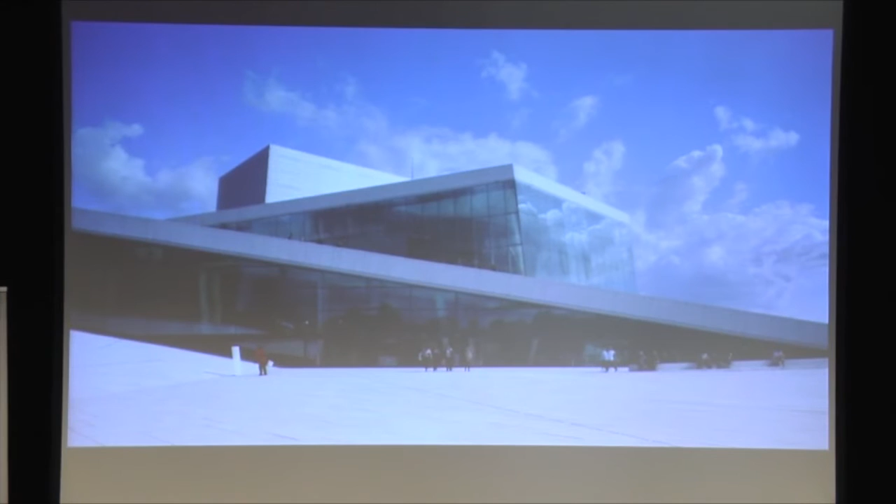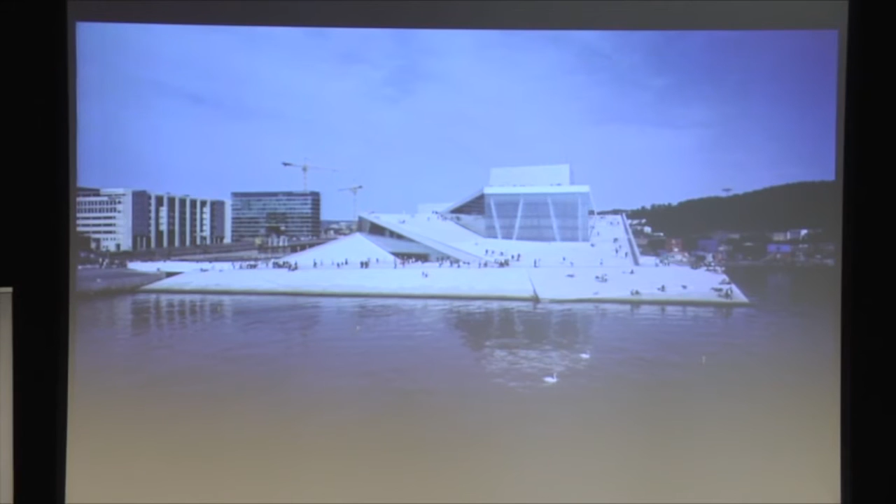Again, the generosity and public space. Of course, an opera has a big program, but what we tried is to make the roof accessible and turn it into a big public landscape space. I think personally that with the realization of the opera, the Norwegian attitude towards architecture, which we can also see in political development, has changed tremendously, because this has also become one of the main touristic attractions for Oslo and Norway.

And this roof is accessible 24 hours, with reference to the Norwegian landscape that we also use quite often. You can also see the foyer, which is also accessible, I think it's only closed at night, and how children use this space. You can see it's also used for festivals. So that's actually a dream that became true, besides solving the opera problem, but also establishing this big public space.

Space and narrative, as I also talked about—this is a concept for the big cultural project that we have currently under construction in Saudi Arabia, in Dhahran. The basic concept for the overall architecture is an arc that consists of different pebbles. You can see that the overall architectural shape or form is dependent on every single element. So all these pebbles represent different cultural functions.

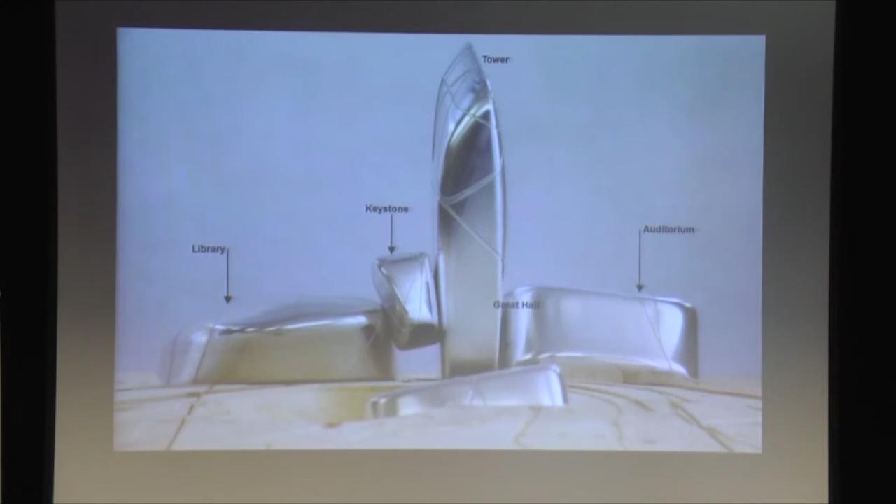This is the competition rendering, and you can see that all the different pebbles contain these cultural functions that I talked about. This is now under construction—this is, I think, one month old. So we actually always have architects working on the building site.

Again, the composition is also accessible by a big roof landscape. Some images from the different pebbles—this is the Great Hall, with a history display, a museum part, and an educational center.

The next project goes in the same direction, but this is really a child space. It's an extension of the visitor center for Swarovski, which you maybe heard about, the producer of these small crystal features, from necklaces to bigger objects. And the theme of the task was play. So it's a visitor center mainly designed for children, consisting of two main elements.

The 20-meter high play tower and the more horizontal outdoor landscape. This project opened in April 2015. So we'll guide you a little bit through the project. You can see the two elements, the more indoor-related vertical tower and the more horizontal outdoor landscape.

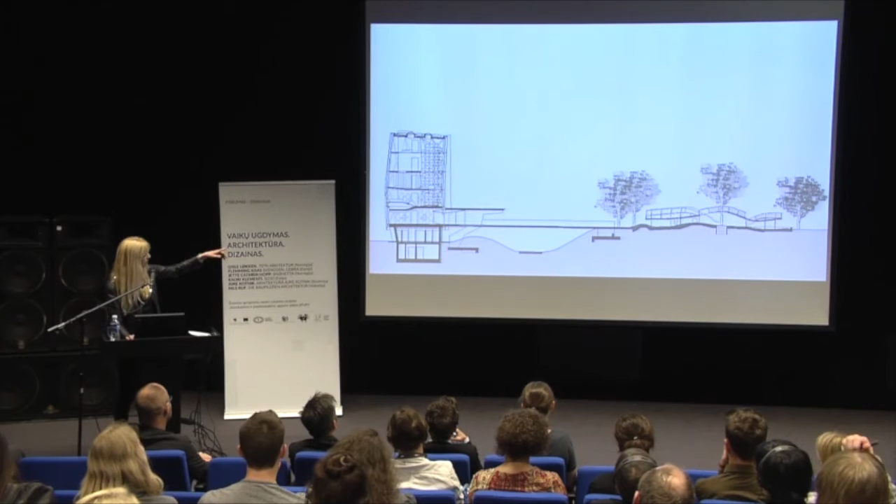And the theme, as I mentioned, was play. So this is kind of how the experience of space works in a more vertical setting, and the outdoor landscape in a more horizontal invitation to play.

The facade image here from the play tower consists of, I think, 140 individual glass panels. And from the inside it consists of 5 levels with different opportunities to play. And here you see it's completely transparent.

I will talk a little bit about the facade. Together with an artist, we developed a pattern consisting of animals that also has to do with some features Swarovski has in its product. We tried to generate, you can say, a silk screen print for the glass panels with a different pattern density.

They are white from outside the print, and from the inside they are black. So from outside it's a kind of shimmering crystalline expression, and all the panels are individual, and the gradient is concentrated so that they look slightly curved, which is a nice architectural feature as well. From inside they are black. Here you can see, they are straight, but kind of curved.

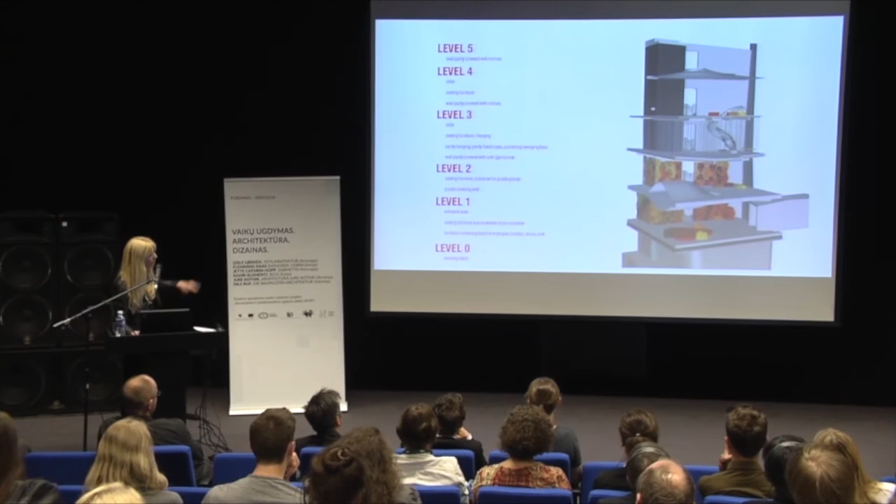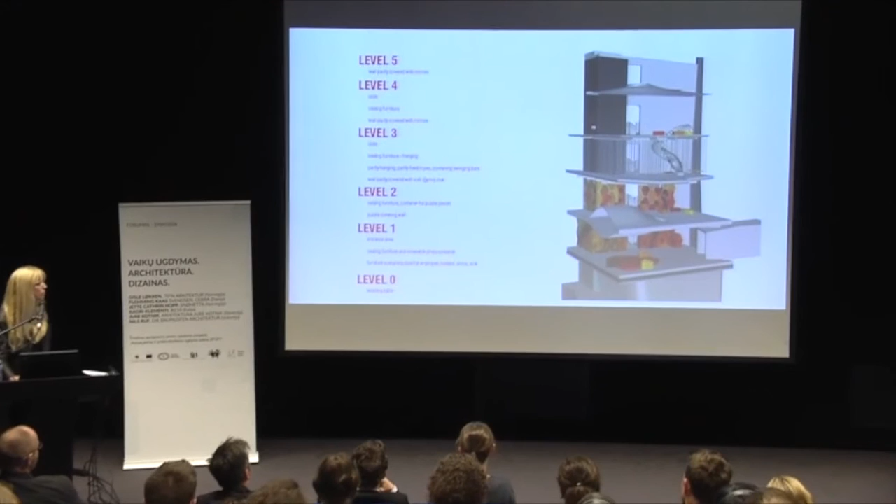Here you can see the organization of the vertical play tower, how the levels are organized. 3 of the levels are linked by a big climbing net structure, which I think is the first in the world, and of course we had to develop this feature together according to security - in Austria and Germany they're quite serious with all these stamps for security - and we got the TÜV, as it's called, for this feature.

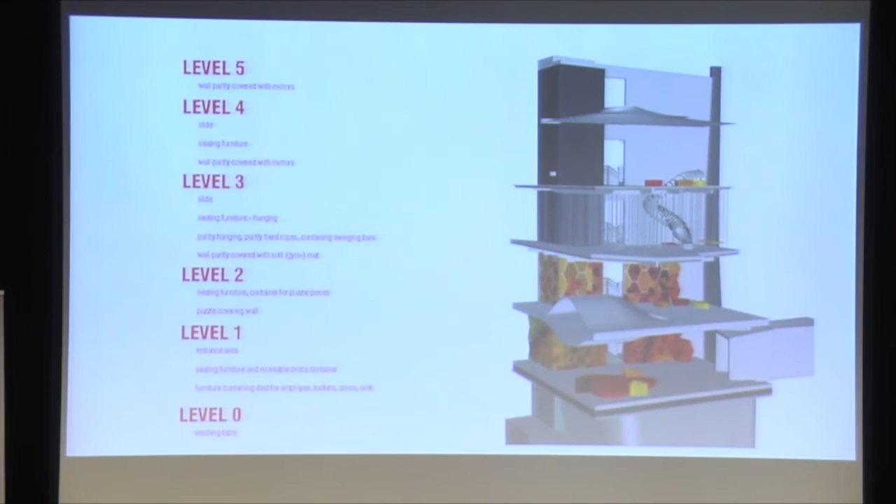Interior-wise, we worked with a color palette that is related to autumn leaves. You can see here an extract, and transferring that to all the treatment of the interior walls, lockers, of course the visitor center, and bathroom furniture, fixed furniture. So that was all kind of developed within this natural language.

Here you see one of the ground levels in use, big excitement. And this great hanging structure where, as you see, you are kind of climbing in this structure and you have this contact with this beautiful landscape in Austria outside.

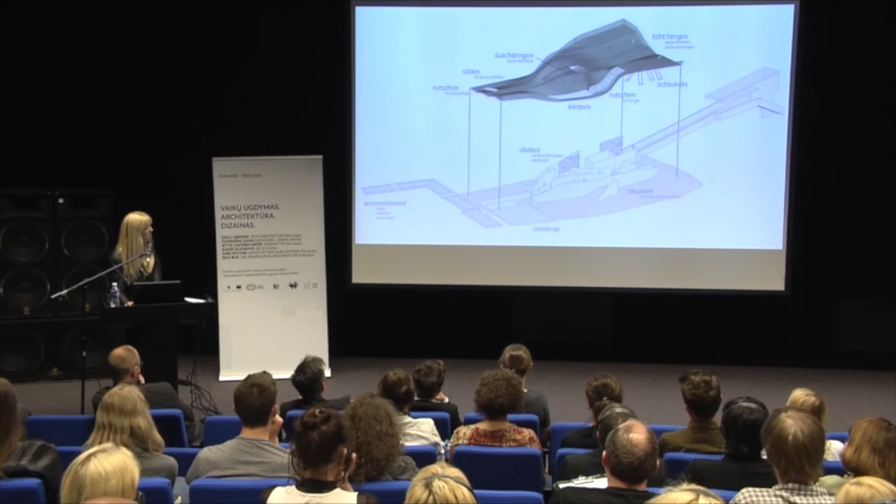The horizontal playground is kind of from two levels. We have this more surface area where you are invited to climb and sit, and the more labyrinthic, dark space underneath where it's more fairy tale related. Here you see images from the outside. And the food and beverage part, of course, there's always a cafe.

Form follows environment. Next project I will show you is a competition entry for a Plus Energy kindergarten project that we developed for an area south of Oslo, the neighbor commune as it's called in Norway. You will see how we tried to develop this sustainability project, in regards of all the technical aspects in that kind of project, but also tried to bring forward the social sustainability when you plan a kindergarten space for children.

The entrance into the project is this watercolor drawing by a very old architect, Odd Østby in Norway, where he wrote a small narrative that follows this watercolor drawing, where he describes his very first impression from childhood, where he went under an almond tree that his parents had in the garden. He said this very initial experience with space he calls Rumkunsten, space of art, where you walk in and you become part of it.

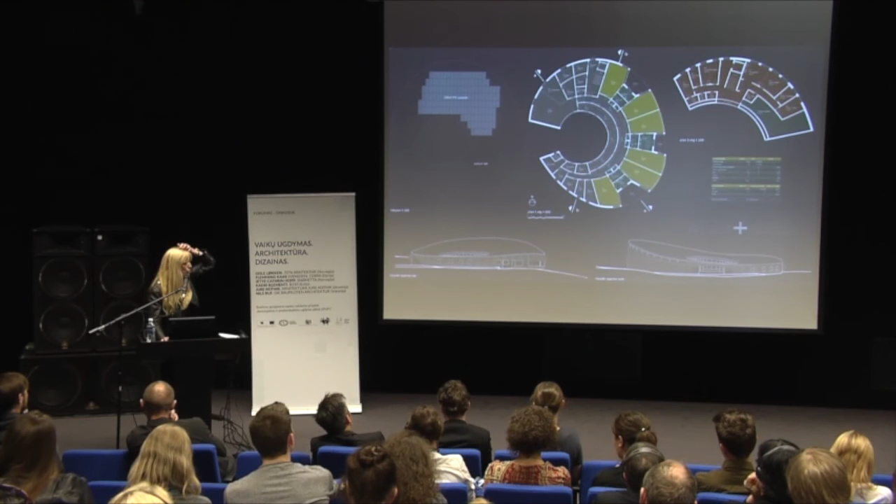In this project we also had to develop an energy strategy for ventilation. All the materials are taken into consideration in a 60-year life cycle perspective, again to show that this building is actually able to go into plus energy. So theoretically, yes.

Some images. You can see on the upper right how we tried to locate these group rooms to frame the beautiful views of the landscape.

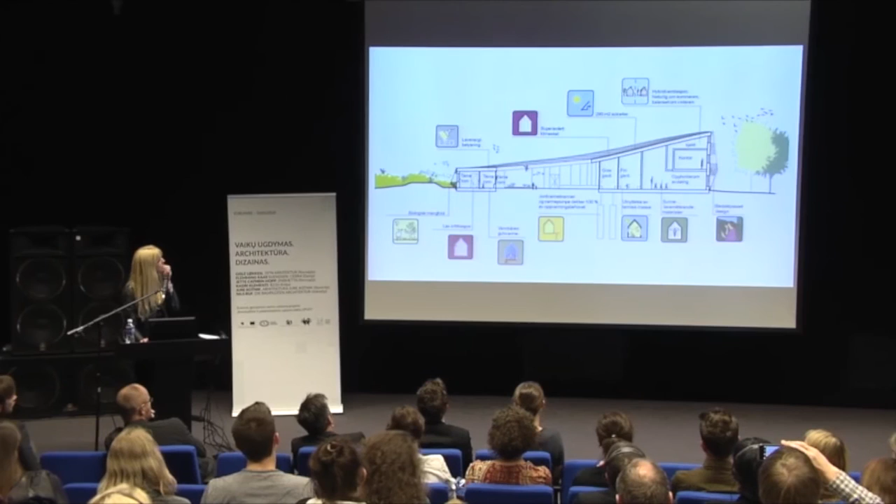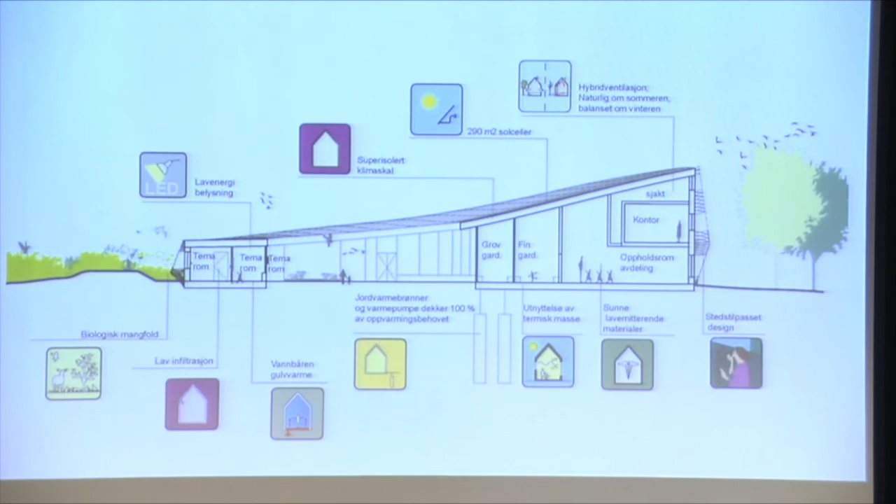An overview, unfortunately in Norwegian, but you can see the kind of toolbox for this environmental approach that we had to take into consideration. Of course, solar harvesting, but also how you design the building itself, everything from the outdoor walls, highly insulated, how you organize the plan, the zoning of the plan, and so on.

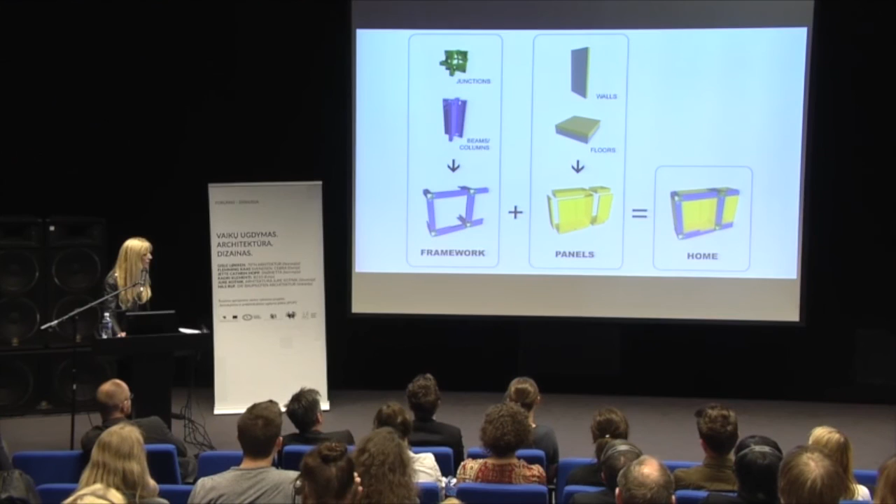Another kindergarten project that is kind of opposite, more a generic starter. Snøhetta developed, almost 10 years ago now, a modular system trying to approach the increasing need of residential projects. That was the first entry, based on a grid of 4x4 meters in both directions and 3.2 meters in height, which gives you a ceiling height of 2.7 meters once all the installations are done.

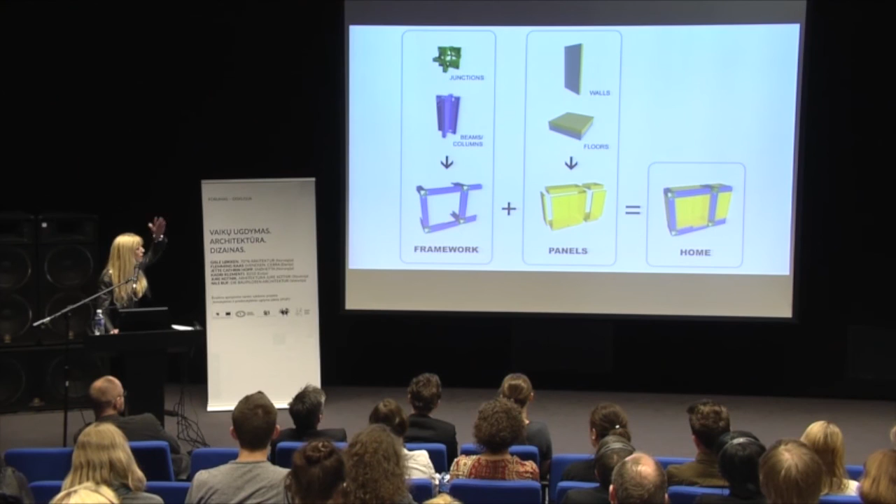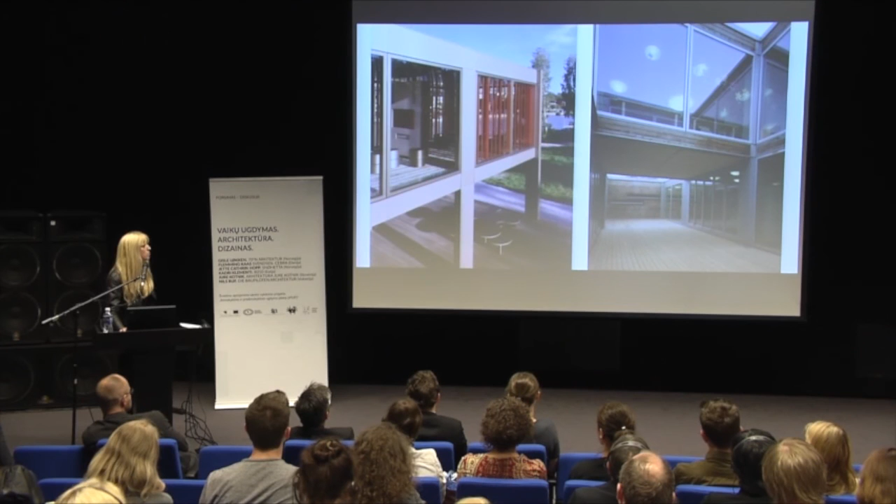So we built a demo house of this system. Here you can see some of the elements, which we also transferred into a kindergarten project that you see on the right side. So it's quite at the other edge of the project I showed you before, but it still works with this generosity of space.

It's a 4-group kindergarten organized in this very simple work model here, working with this atrium and outdoor-indoor relationship. You can see from the construction and some images of the finished project.

The last project I'll show you is more a feasibility study that we did with a private client who wants to develop an international museum for children's art in Oslo. Our client was very focused on this area in Oslo, which is now being under construction or development for decades, I would say.

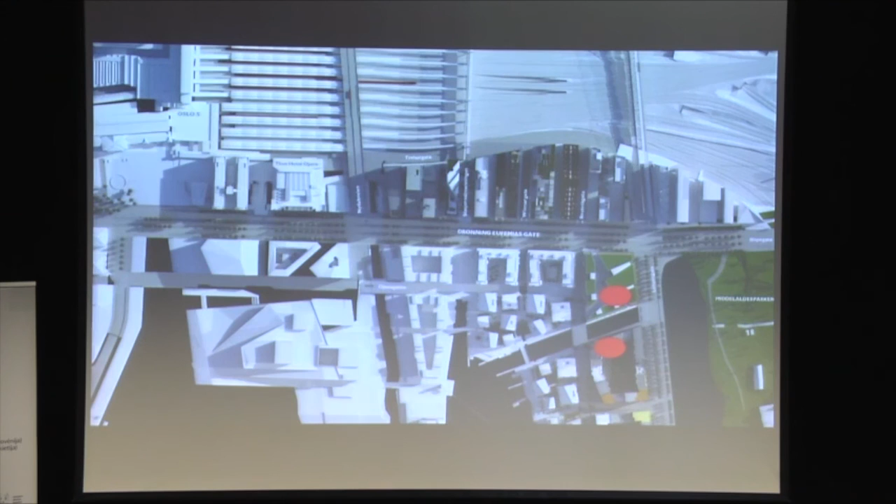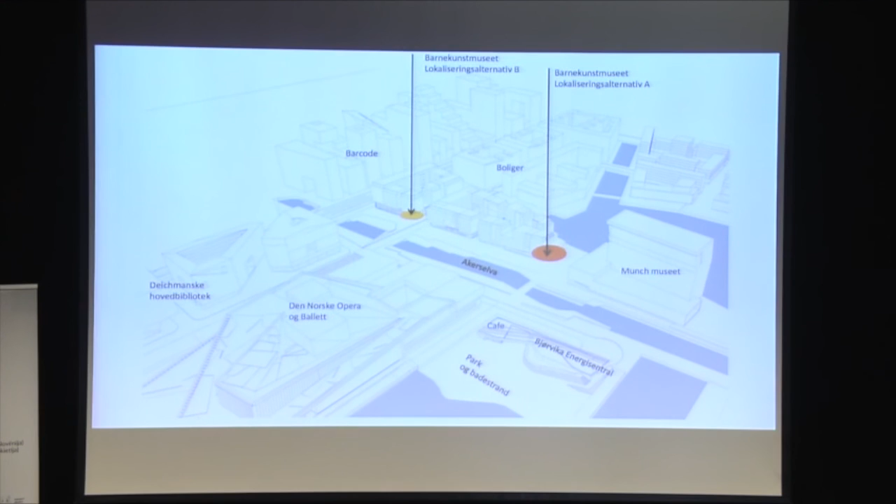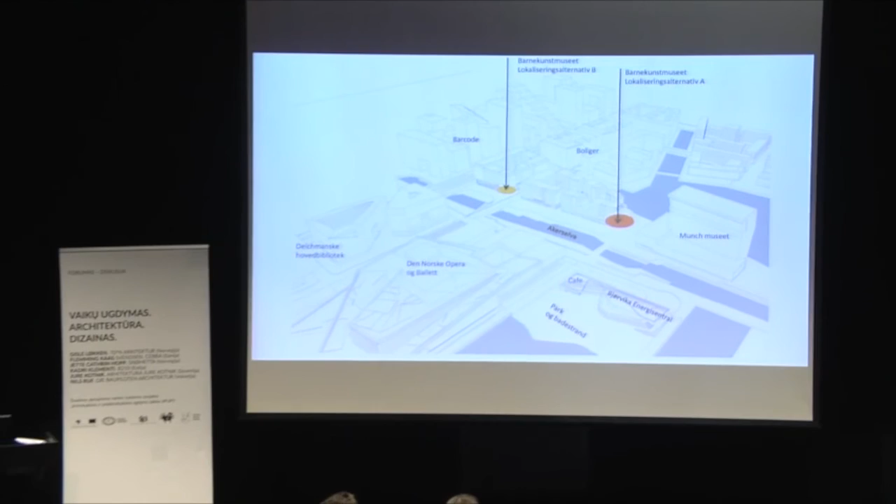So together with our client, we looked at possible future positions in this area for this child art museum. And that raises, I think, a very important topic: the role of children in that kind of dense urban development. Because as you can see here, this is an opera and ballet, and you take children there, but there's actually almost no space dedicated for children in this area.

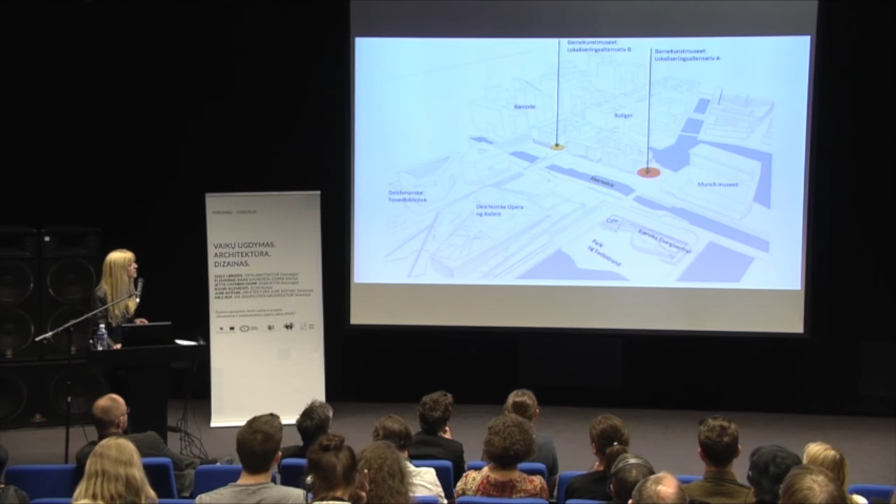So we thought that was a good opportunity, even though it's a museum, it's still a program dedicated to children and those who are interested in that kind of art. Very simple illustrations, because we don't have a concrete plot yet. It's more to show the possibility of how to activate the ground floor area in this future development.

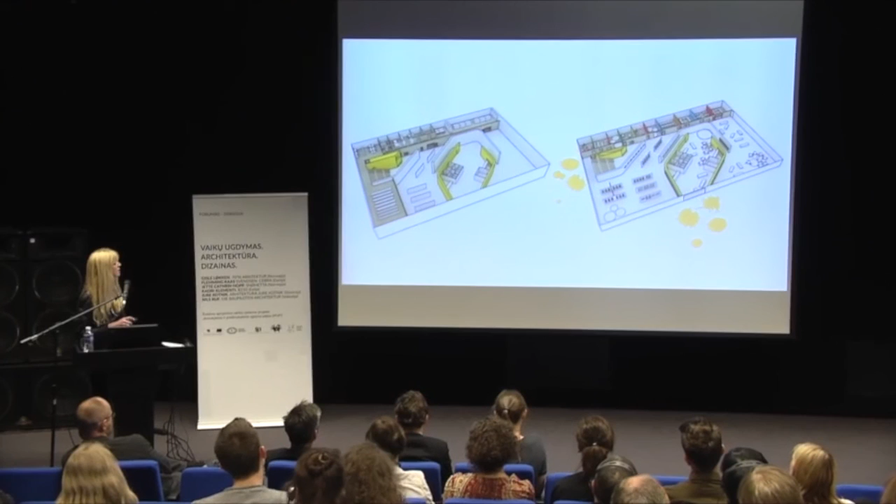As you can see here, it takes two basic levels: an exhibition area in the lower part, and a two-story edge with more education, small ateliers, and workshop-based activities linked to that museum.

We also did the brand design for this in this feasibility study. As I told you before, Snøhetta also consists of graphic and brand designers, as you can see here.